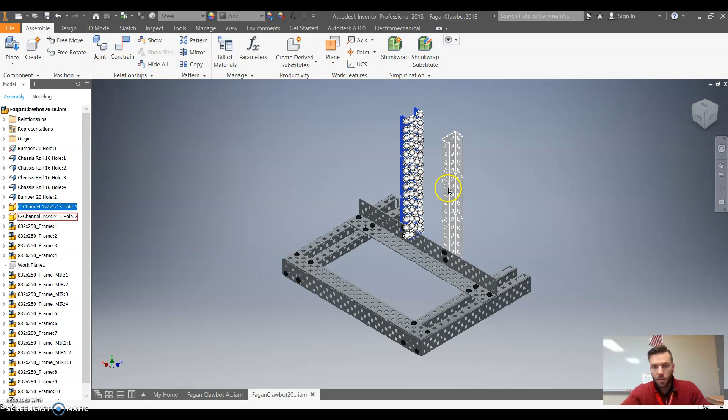Alrighty, so with this final video, I just want to show you how to put together the bolts and nuts to get those into this assembly, because in the end you want your product to look like this with these 8 structural pieces, these 18 nut and bolt combos, and you want it fully constrained that I can click on any of these and they don't go anywhere. And it's not because they're grounded, but because they are constrained to a single part that's grounded, the bumper.

Alright, so let's look at how to do that. So I'm going to come over here to this kind of practice file I've been using. And you can see I have a couple bolts and nuts in here already, but I want to show you the process for getting those in. So for one thing, let's spin around, because we're going to work with this area first. And we'll zoom in a little bit, if I can, using the trackpad again. So there we go. Alright, so let's do place,

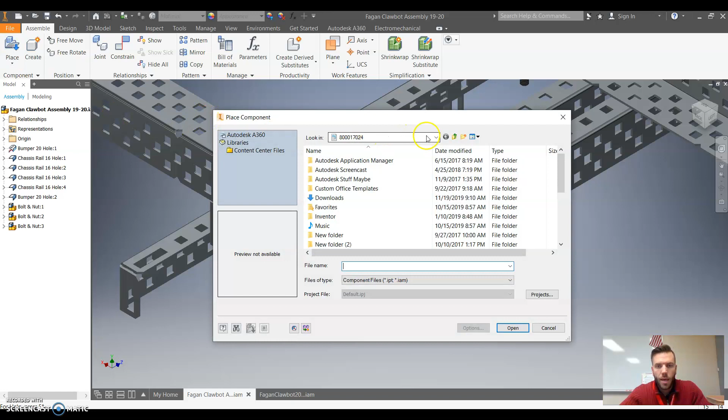and we got to go to the right place to find these parts. So find your name, Google Drive, and you're going to find the folder that this stuff all came from. Now honestly, I have to remember where that was. I think for me that was here. I think it's in the inventor folder. Sure hope so. Let me go back up one. It was not for me. It's actually in here. Okay, now we're getting there.

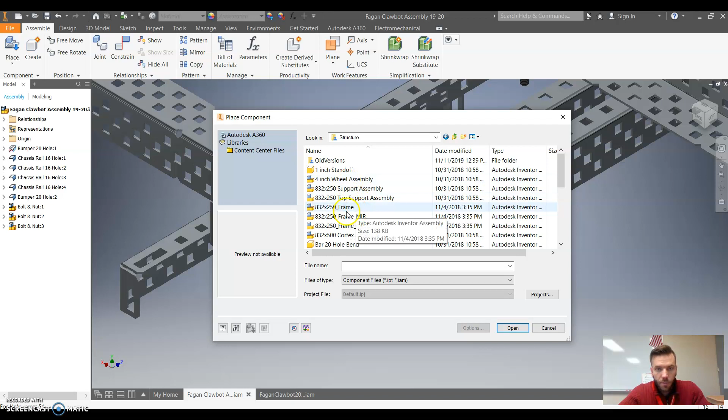Alright, good. So we need some structure. And you can see I already have a subassembly. So this is a little sneak peek at what I'm going to show you how to create. You're going to demote a subassembly, but that'll be later on. So go into my structure, and let's do the icons, so it's a little easier to see. So medium icons. Yeah, it's not showing me the icons like I want, but we want the 8/32, and we want a Keps nut, so we'll use that. So let's bring one of those in and just set it to the side over here.

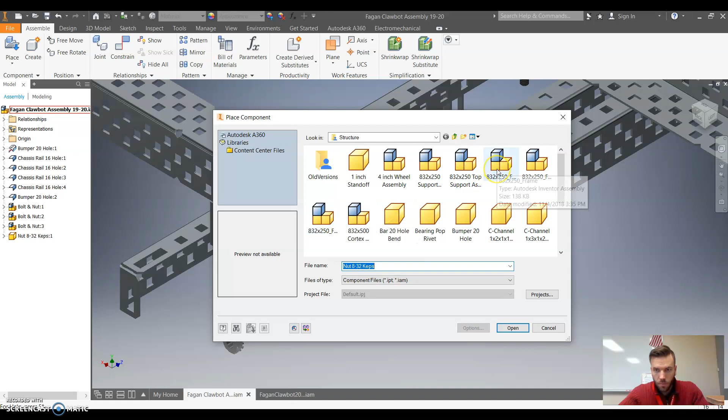Alright, so I'm going to right click, say I'm done with that, and we're also going to place the 8/32. This one I think is what we want. No, those are assembly files, so I am looking for just a part file. It's an 8/32 bolt. Okay, there we go. We want the 1/4 inch long. Alright, so I've got this, and I can rotate it once if I want around the y-axis. Oh, let's do it 2 more times. I went the other direction. Alright, so I've got that. I'm going to right click and say OK.

And basically you'll need to put this into these holes, right? So it looks like there's going to be one going into right down here. Okay. Well, here is where using the iMates would be helpful. As far as getting the other pieces connected, I didn't think that was very helpful for you all, so that's why I showed you how to constrain using mate and flush. But in this case, it can be useful. So to do that, let's drag the bolt a little closer over.

Okay, and you see when I click on it, there's this white circle. That is called the iMate. So an iMate is basically a half of a constraint that can pair to a second constraint half, right? Which is also called an iMate. And if you click on one of these pieces, they already have a ton of iMates. So the trick is getting it to the right one. So I'm going to hit Alt, that key. Actually, before I even do that, click this. All right, so that iMate is visible.

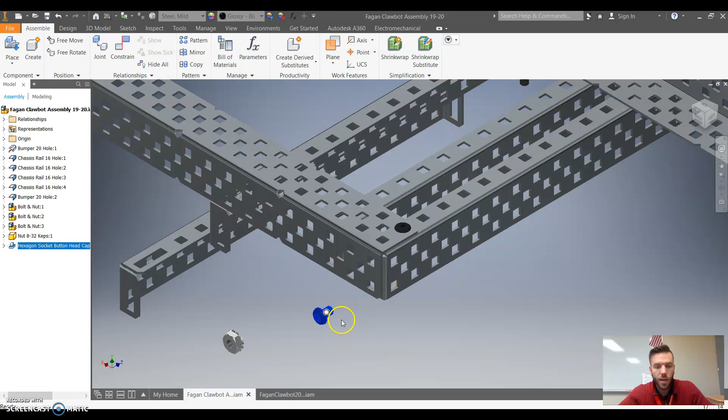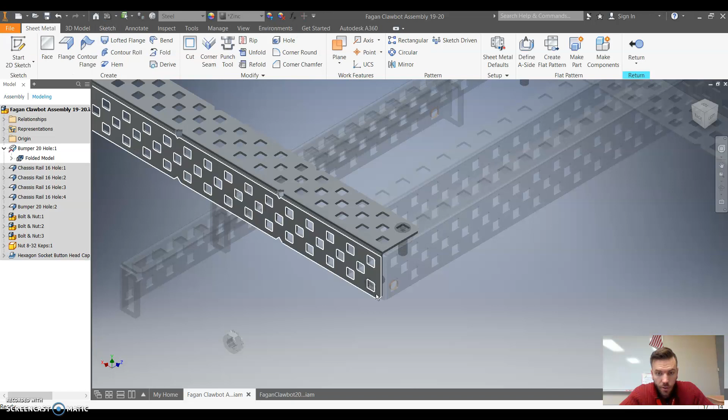Click Alt, click the iMate, and drag it towards here. And we're going to try to hover over one of these iMates until it is lined up the way we like. All right. I might need to zoom in to do this better. Now that looked pretty good. So I'm going to let go. And then let's zoom in on it. Make sure that's what we want. It's zooming out, unfortunately. Alright. Yeah, it looks like that's about right.

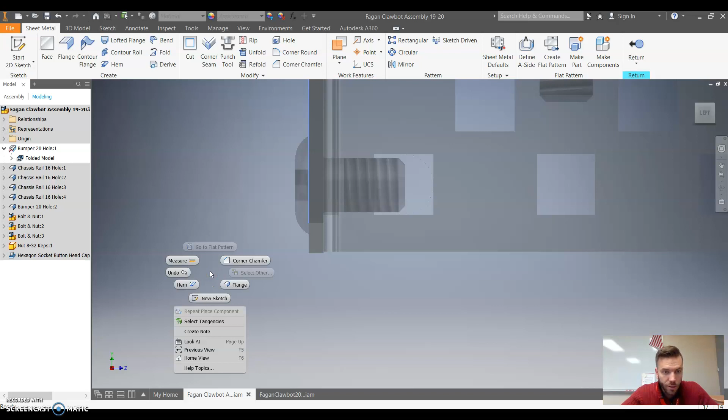Let's go to the left view. Zoom in. Okay. So it's possible it's actually shrunken inside a little bit, like it's gone too far in. But for our purposes now, that's not going to be a big deal. All right, so somehow I made the visibility get all weird. So let's do return. Okay, return is all we had to do. That's a good lesson. When things get weird, make sure you are not in this setting where you need to click return. Okay, so there's my bolt, and I need to get a nut on it. All right, so I'm zooming out.

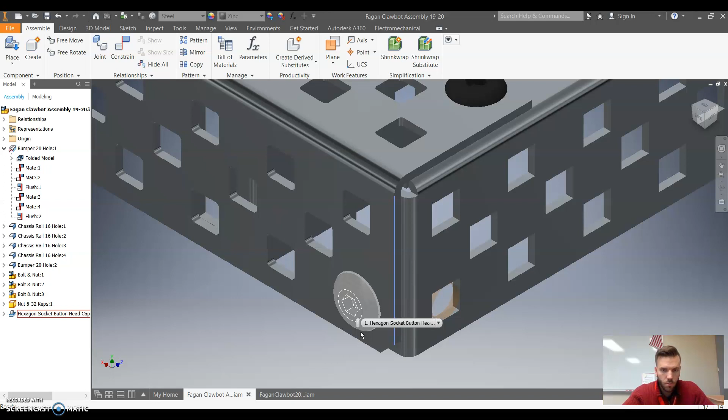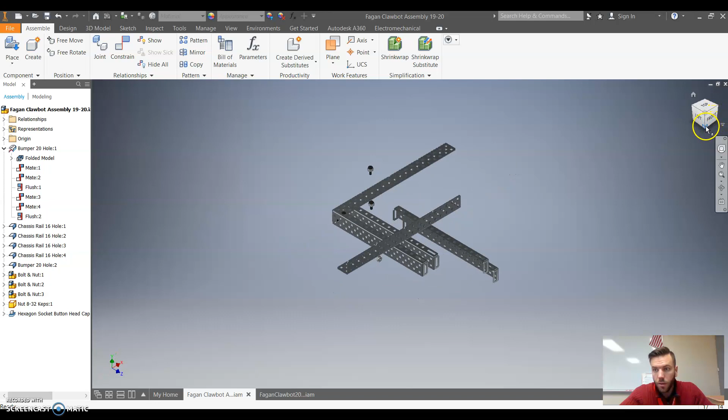Trying to zoom out. Well, let's just do this. Okay, so there's my nut. Let's bring it a little closer, and we've got to get on that underneath to get connected to this. So I wonder if I spin like this down below, and then try to zoom in. Okay, now we're kind of more in the area here.

Let's see, I'm trying to get to where that nut was visible. If I've lost a nut, I can actually just drag another one in so it's visible. Okay, and again, I think we can use the iMates. So go, or first click on the object. It doesn't look like it has an iMate on it, so that's okay. We'll just constrain this normally.

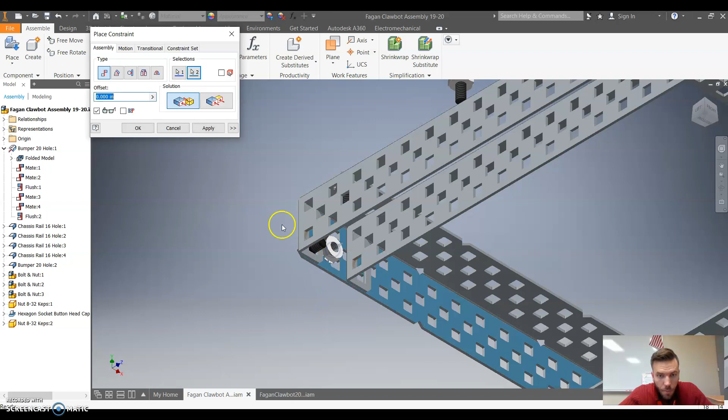So we would go constrain, and we do want a mate first, and so we want this surface. So I can see the arrow right there to constrain to this surface. All right, click apply, and then I want the center lines to mate. So we want essentially this center line to mate with this center line. All right, click apply, and that is now on there.

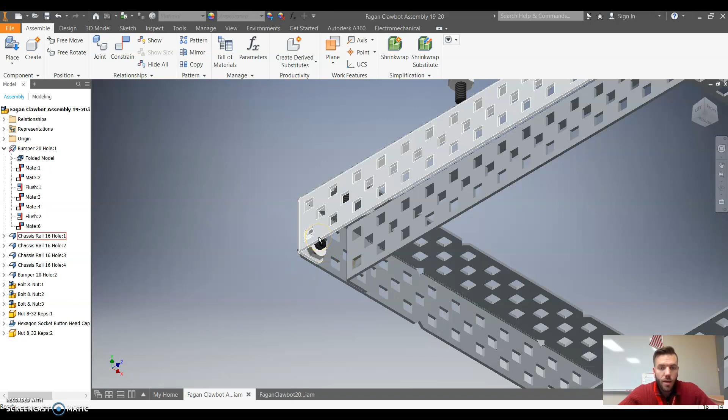All right, and yeah, again, it's gone through the structure a little bit. If that happens, that's okay for what we're doing. But that would be a lot of nuts and bolts to add if you had to do it individually like that. Looking back at this, there's 18 of them, and having to go through and do each one like that would take a long time. Well, you don't necessarily have to do that. There is a way to demote and create your own subassembly, which I'll show you here.

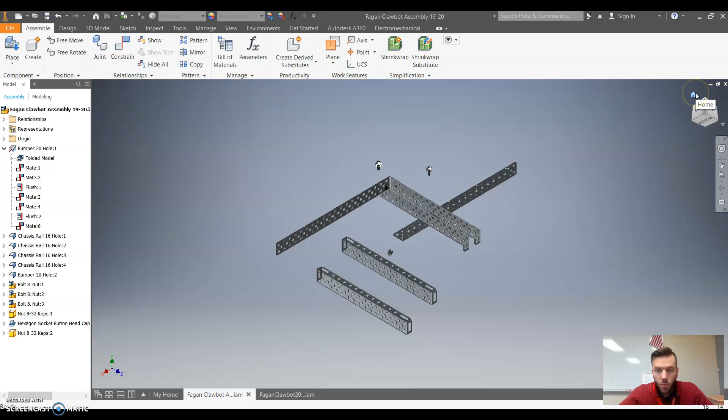So what you would do is, view's gotten all funky on me. Let's go back to this. You would basically bring in, or choose your item. Okay, so it was this bolt, right? And actually, let's also select that nut. So I'm going to do control select so we get both at the same time. Right click and go to component and demote. And here we can actually create our own assembly.

So what we could call it is nut and bolt 2, because I've already made one and I don't want it to get confusing. But be very careful, make sure you save it to the same folder that all the other parts are coming from. Right now it is not. Not just confusing, it wouldn't open it, because when you go to open this assembly later, it's going to be looking in a particular folder for all these parts. And if those parts are stored in other folders, it's going to say, I can't find those.

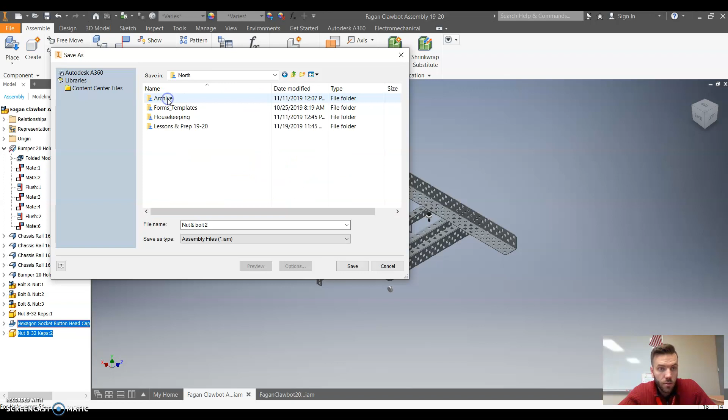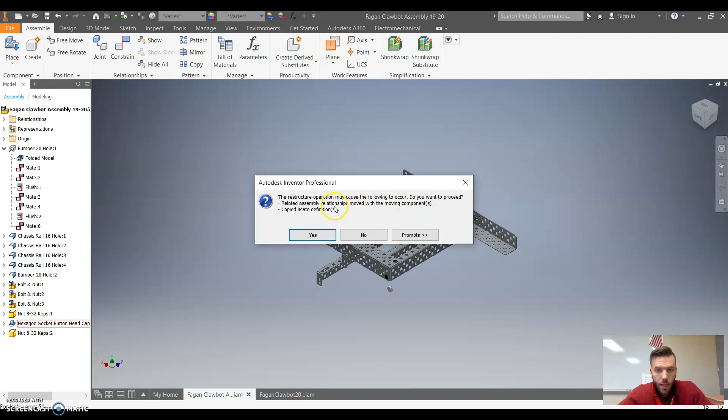So right now I'm going to change that to put it in the same folder that all these other things are in. For me right now that is my name, Google Drive, North, and it was in this folder, I believe. Yes. Okay, so I'm going to put it in here with the Clawbot assembly. So click Save, and now it's correct, so I'll click OK. And yep, we want these things copied, so we'll say yes. All right, and so now that is together.

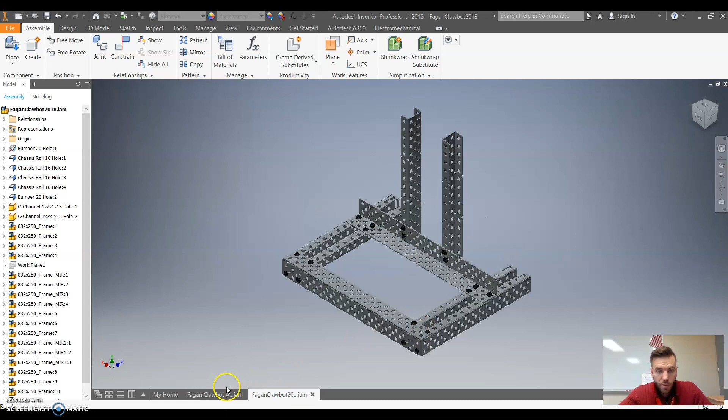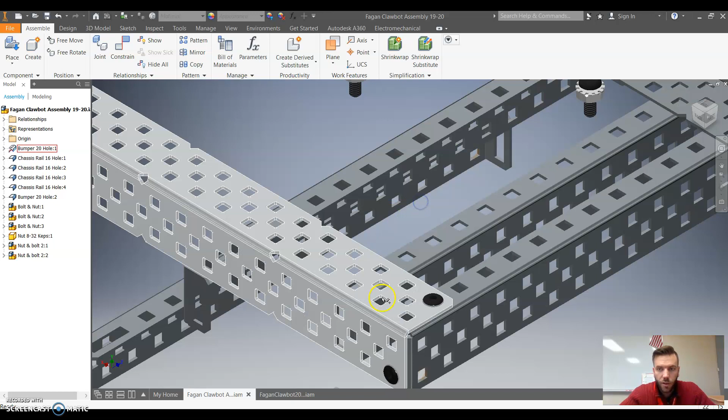So the cool thing is, when I want another one of these, I can literally just go to my browser, drag it in, and place it where it's supposed to go, which my next one looks like it'll be next to this other bolt there. So, trying to zoom in, we want that to go there. Let's see if we can zoom in just a little more. Okay, that's pretty good. I wish I could move my view a little bit, so I'll zoom back out.

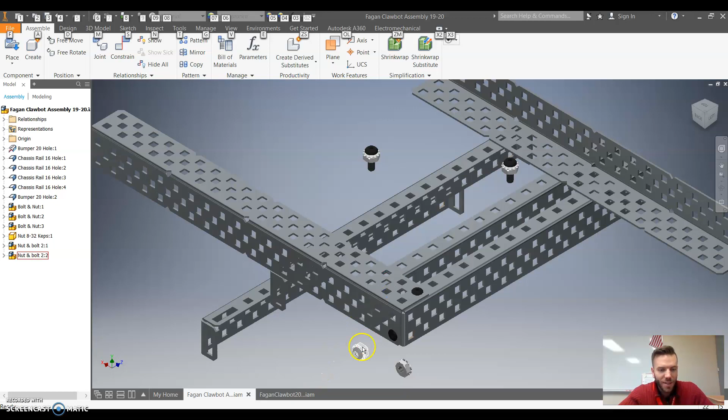And same thing. Click on the item, see the iMate, then click the Alt key, grab the item, and move it to where you want it to go, which is going to be right in this area. I've run out of trackpad. Okay, I'll have to bring it back. But that is the idea. So once you've done that, it's going to make things go a lot more quickly for you.